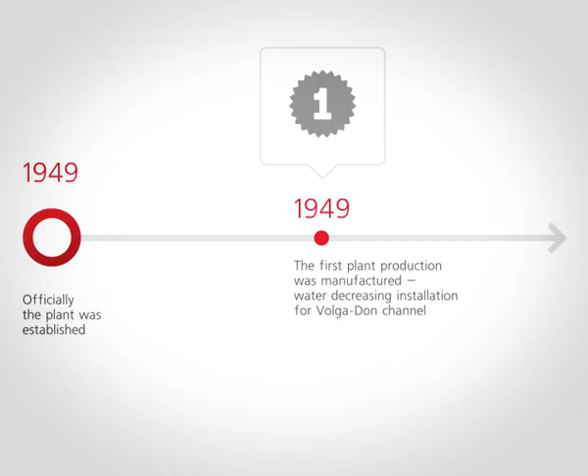Officially, the plant was established in 1949. The very first product manufactured on the plant was a water-decreasing installation for the Volga-Don channel. A centrifugal pumps range was developed for post-Second World War USSR national economy restoration. The first barrel case feed pump, PE 320-180, was supplied to Pridneprovskay TPP.

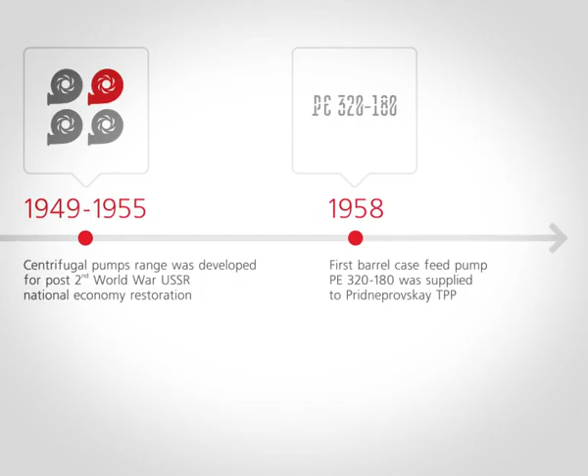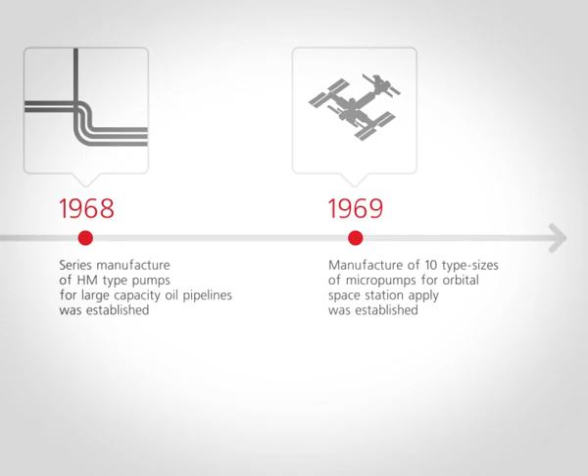Series manufacture of HM-type pumps for large-capacity oil pipelines was established. Manufacture of 10 type sizes of micropumps for orbital space station application was established. More than 1,000 pumps for nuclear power plants of the Soviet Union and other countries were manufactured.

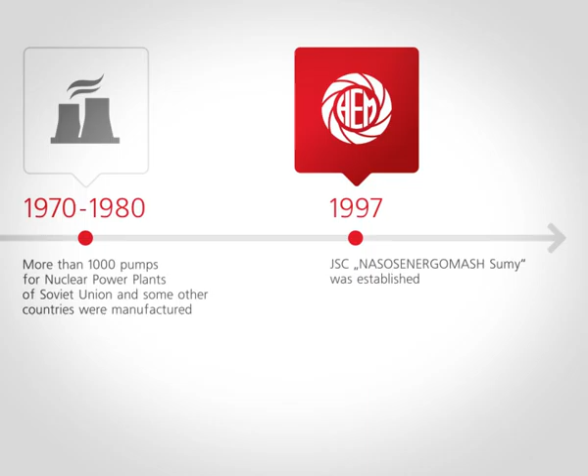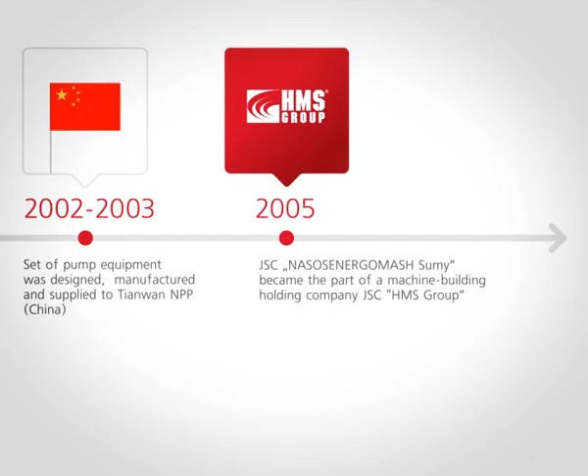Joint stock company Sumy Engineering Works Nasos Energomash was established. A set of pump equipment was designed, manufactured and supplied to Tianwan Nuclear Power Plant, China. Joint stock company Sumy Engineering Works Nasos Energomash became part of a machine building holding company, JSC HMS Group.

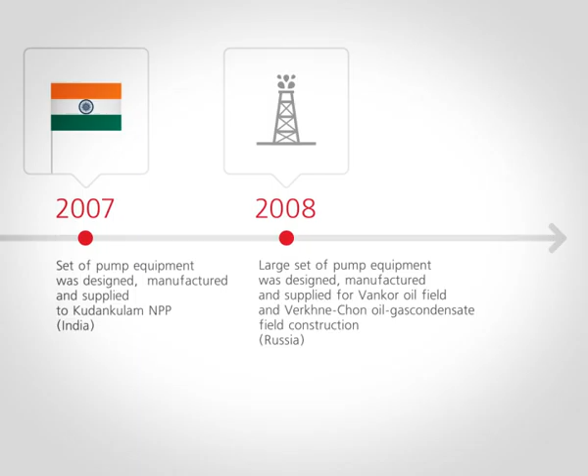A set of pump equipment was designed, manufactured and supplied to Kudankulam NPP, India. A large set of pump equipment was designed, manufactured and supplied for Vankor oil field and Verkhne-Chon oil gas condensate field construction, Russia. Among the largest projects: Yilyngynagys machine channel, main water pipeline channel Zakhmet Turkmenkala, main and booster oil pipeline pumps for oil pipelines Purpe Samotlor, East Siberia Pacific Ocean, and Zapolyarie-Purpe, Russia, were designed, manufactured and supplied.

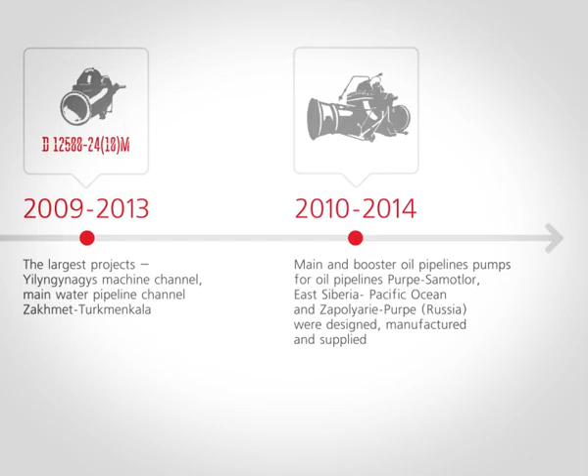A set of auxiliary and emergency cooling pumps, 36 pieces, were designed and manufactured for the 3rd and 4th units of Tianwan NPP, according to contract with CNEIC, China Nuclear Energy Industry Corporation.

From 2005, joint stock company Sumy Engineering Works Nasos Energomash became part of the large multi-profile industrial investment group Hydraulic Machines and Systems, HMS Group companies.

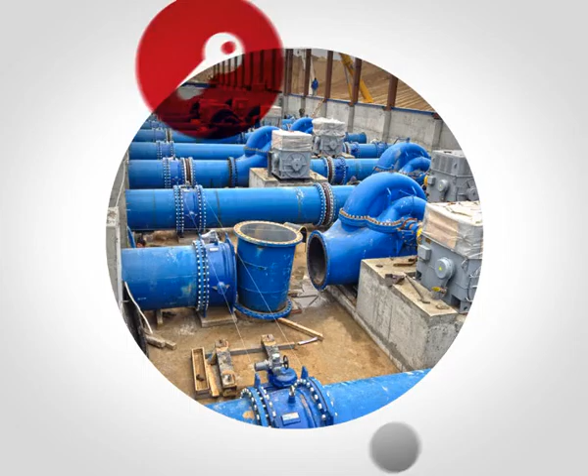Key activity of the HMS Group is EPC engineering and complex equipment supplies for the following industries: oil and gas mining, water supply and offtake, nuclear and thermal power generation.

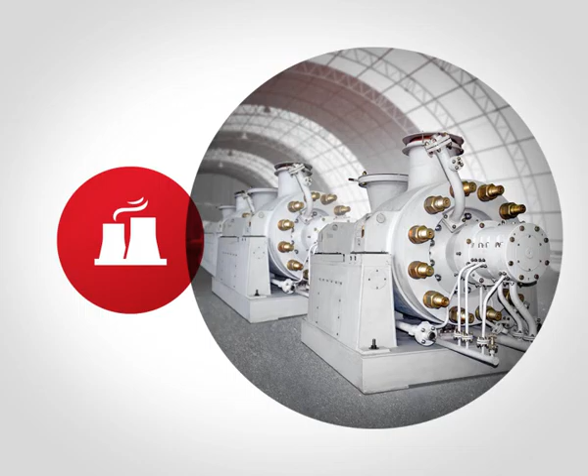Joint stock company HMS Group today is a well-recognized leader in design, production and supplies of pump, compressor and block module equipment. Staff more than 16,500 employees. Number of dealers more than 150. Equipment supplies for former Soviet Union countries, Eastern and Western Europe, Iraq, Indonesia, India and China.

Joint stock company Sumy Engineering Works Nasos Energomash is one of the biggest enterprises of HMS Group. Production area more than 81,250 square meters. Product range includes more than 600 articles.

540,000 is the overall number of pumps manufactured throughout the plant's history. Over 1,300 pumps were built and supplied for nuclear power plants. Today, the plant's product supply geography covers more than 50 countries on 5 continents.

An ambition for constant improvement of products and solutions allowed joint stock company Sumy Engineering Works Nasos Energomash to get leading positions in pump production for the following industries: oil mining and transport, thermal and power generation, housing and communal services, water supply and offtake.

Clients of joint stock company HMS Group and joint stock company Sumy Engineering Works Nasos Energomash are the leading industry companies. Long-term partner relationships with clients have always been our core business value.

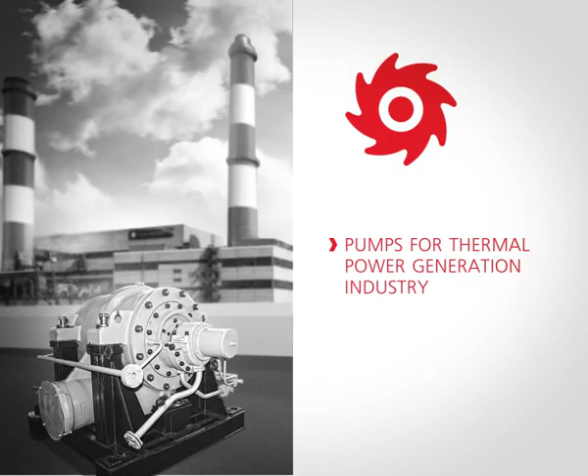Since the first boiler feed pumps built in 1959 to modern times, the company has manufactured and supplied more than 111,800 pump units for thermal power plants all over the world.

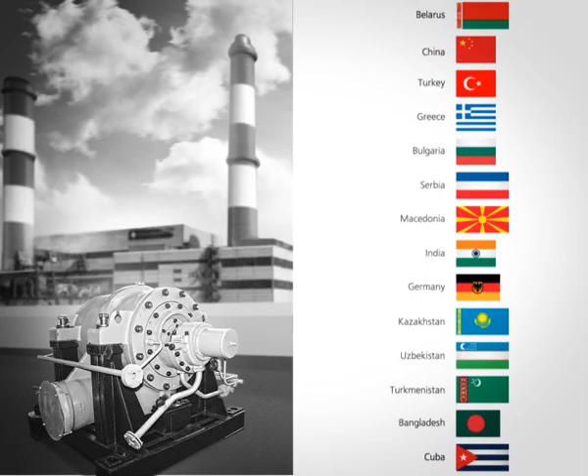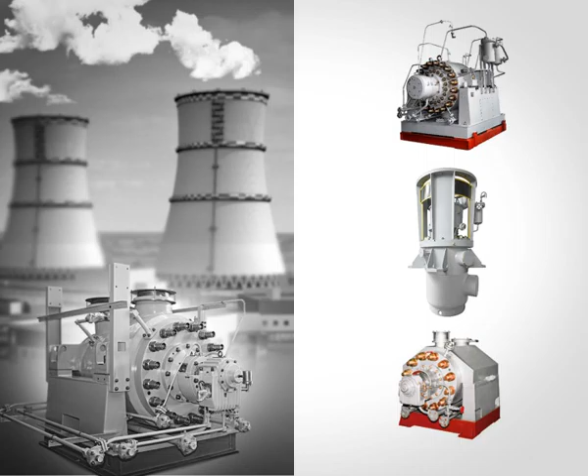Pumps for nuclear power generation industry. Sumy pumps are installed in all nuclear power stations of Russia and Ukraine. They were supplied for NPP construction in Bulgaria, Hungary, Slovakia, India and China.

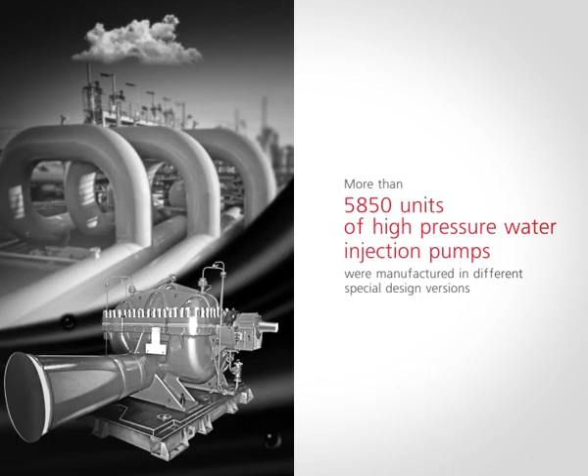Pumps for oil and petrochemicals pipeline transport. More than 5,850 units of high-pressure water injection pumps were manufactured with different customized design variations tailored for each particular customer.

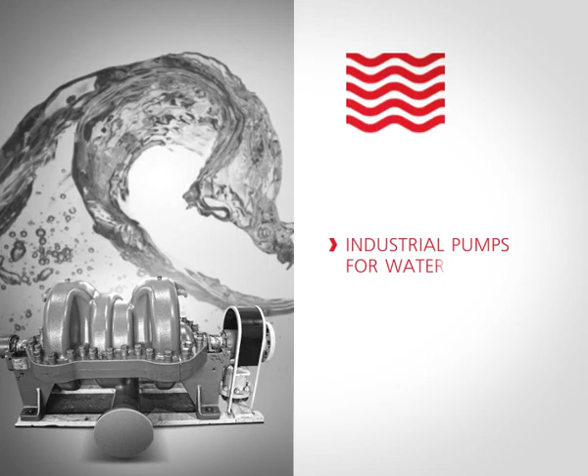Industrial pumps for water supply and offtake. More than 150,000 industrial pump units were manufactured and supplied for the pump stations of Europe and Asia.

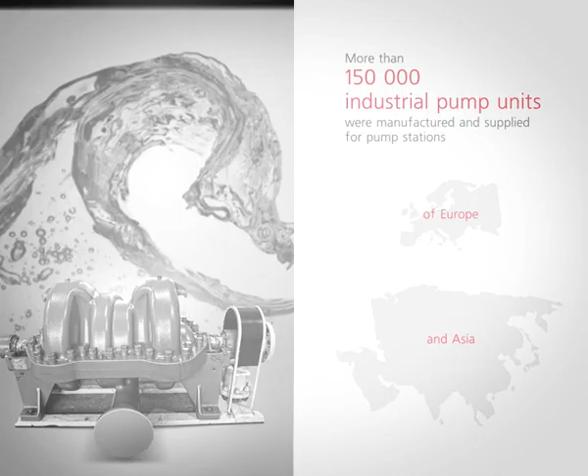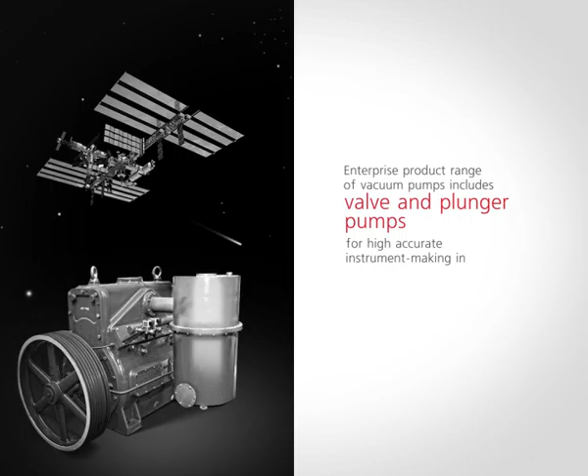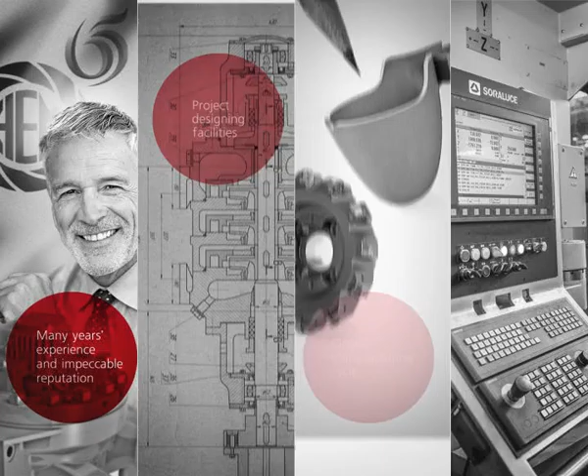Vacuum pumps for various industries. The product range of vacuum pumps includes valve and plunger pumps for highly accurate tools and instruments, microbiological installations, and electrical engineering. The enterprise's claim to success is based on years of experience and impeccable reputation.

Project design facilities. Closed manufacturing cycle. Innovation in production technologies, as well as business process automation, quality control, high accuracy testing, and complete after-sales service.

Project design facilities. The enterprise structure includes a powerful research and design department.

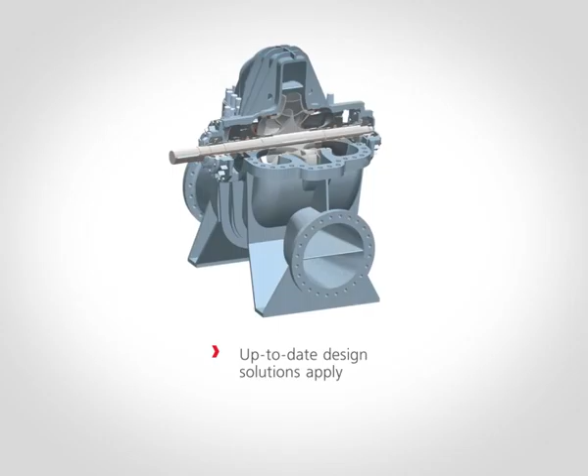Besides our own design department, the enterprise has tight cooperation with the leading Ukrainian Research and Design Institute of Nuclear and Power Pump Building, VNIIAEN. This cooperation guarantees state-of-the-art design solutions, advanced high-precision calculation methods, research and experimental testing for all design elements of the pump unit, and new technology and equipment.

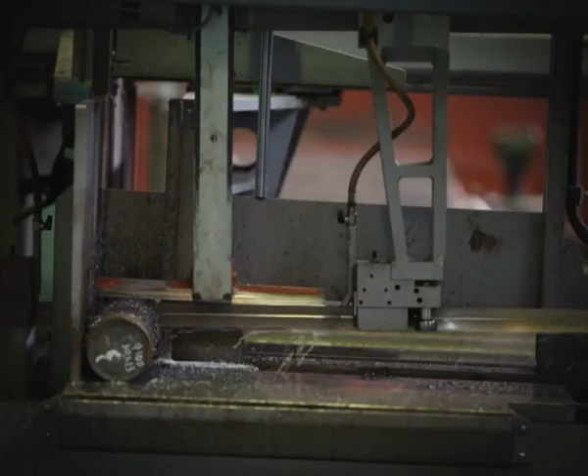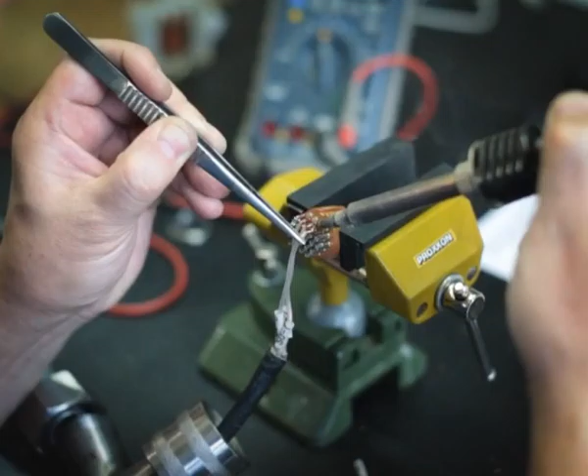Joint stock company Sumy Engineering Works Nasosenergomash constantly innovates in product design and manufacture. Such policy is very important because we ship sophisticated and reliable pumps to the world's biggest companies.

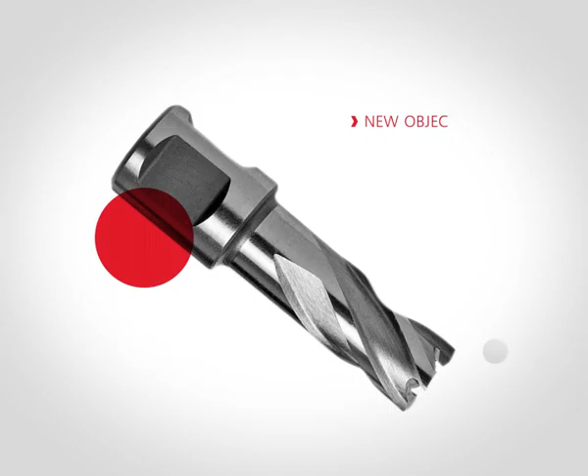All our manufacturing departments were recently modernized and their processes optimized. To ensure high quality of our products, we renew and improve our machining park on a regular basis, as well as implement new units and equipment.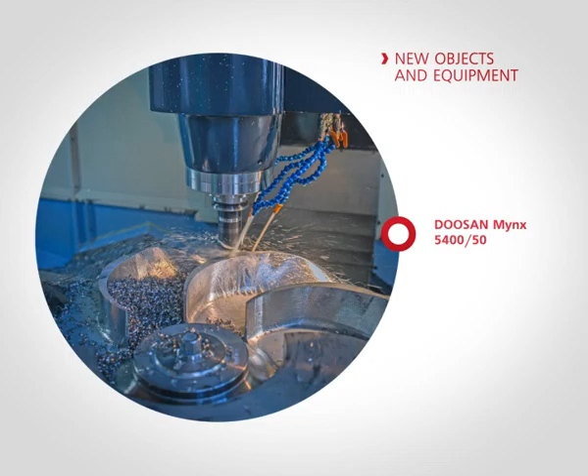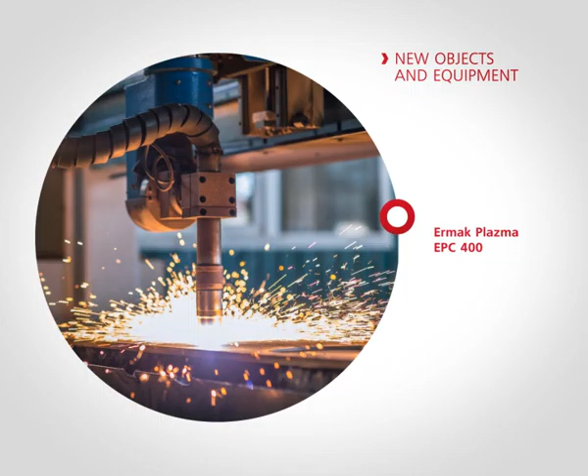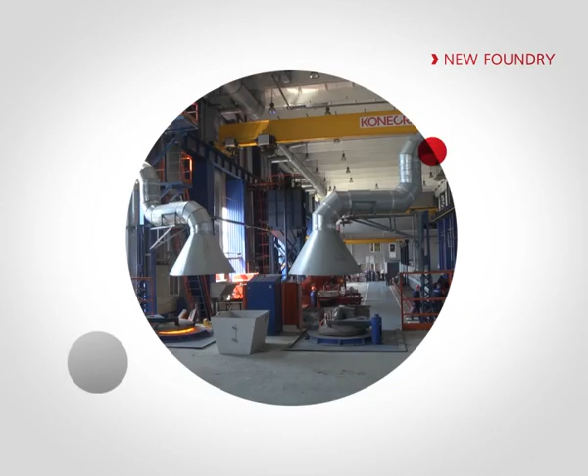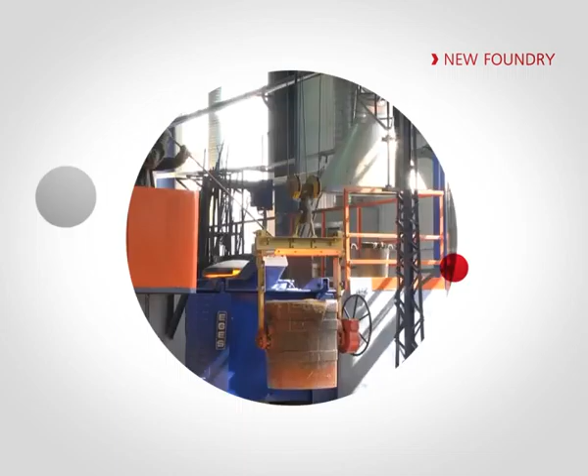To maximize foundry automation and increase casting product quality, we launched a new foundry where human factor is down to a minimum. The new foundry's annual production capacity is 4,000 tons of casting. New foundry product materials are the following: cast iron, different cast steel grades, duplex and super duplex steel. New foundry products comply with world's leading standards by general outlook, meticulous design, and physical and chemical characteristics.

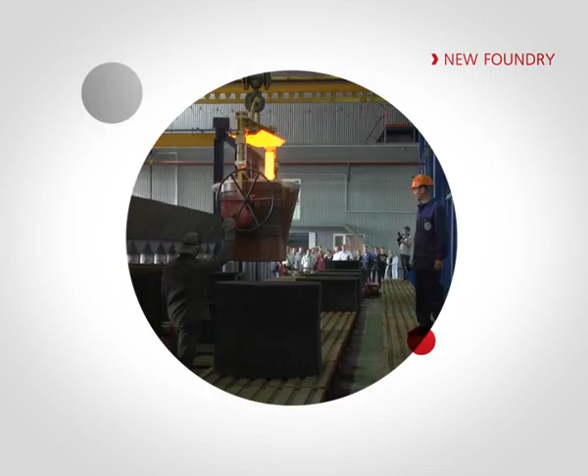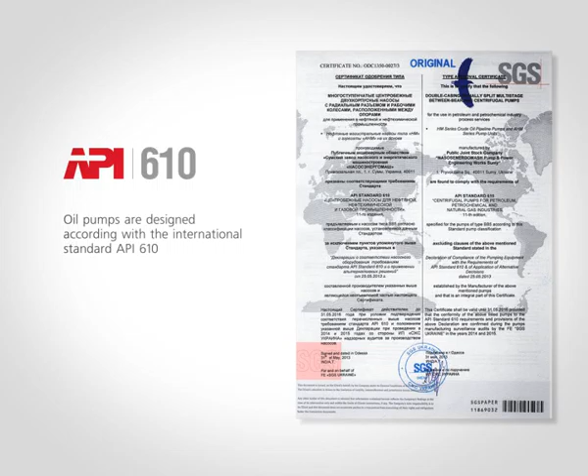Quality control: pump units are manufactured in full compliance with leading international industry standards. Oil pumps are designed according to the international standard API 610. Our oil pumps are included in the purchase list of joint stock company Transneft. Pumps for the nuclear generation industry are included in the catalogue of equipment and materials for NPP designing, building and operation of the Russian Federation.

We have implemented an integrated management system certified according to the international standards OHSAS 18001-2007 and ISO 14001-2004.

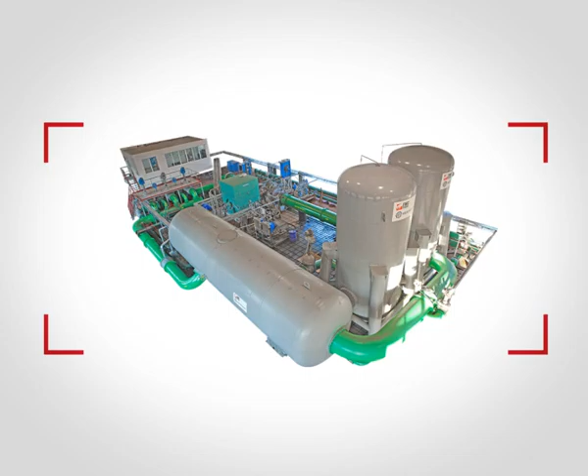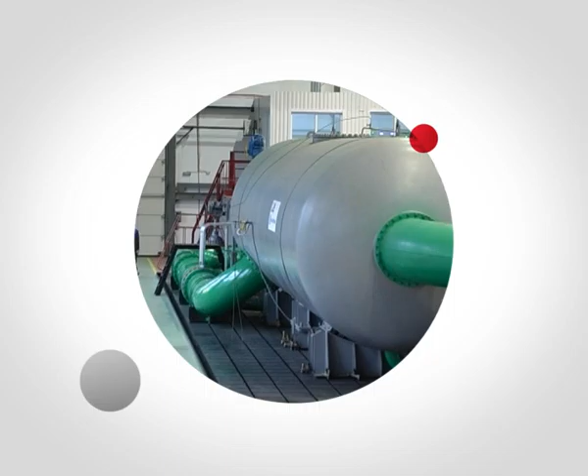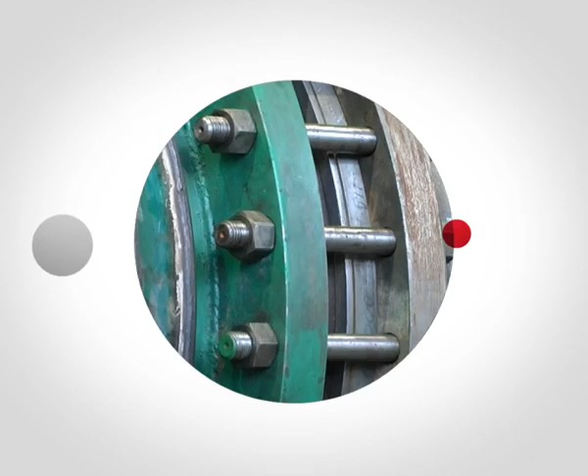High accuracy testing. What makes our enterprise truly unique is the testing complex for high-pressure electropumping units, as well as large flow units, which have no analogies anywhere in CIS and Eastern Europe. Our testing complex makes it possible to test our pump units at nature capacity and rotation speed. It can also be used to simulate different failure and emergency situations which could occur during actual operation. Only several of the world's leading companies have similar testing facilities, and now joint stock company Sumy Engineering Works Nasos is one of the leaders in this field.

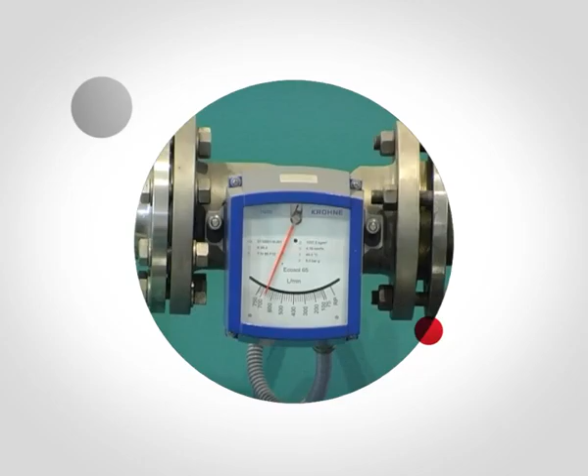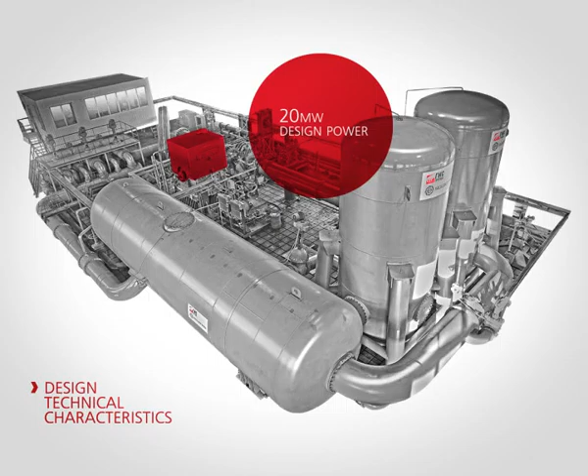Design technical characteristics: design flow 25,000 cubic meters per hour, design pressure 280 kg force per square centimeter, design power 20 megawatts. Taking part in large-scale international projects, over the last 5 years, the enterprise has made significant progress in entering new markets.

Nuclear power generation industry: we take pride in one particular type of product, a state-of-the-art boiler feed pump for NPP, PEA 1840-80. These pumps are intended for boiler feed water supply from deaerator to steam generator of the NPP unit.

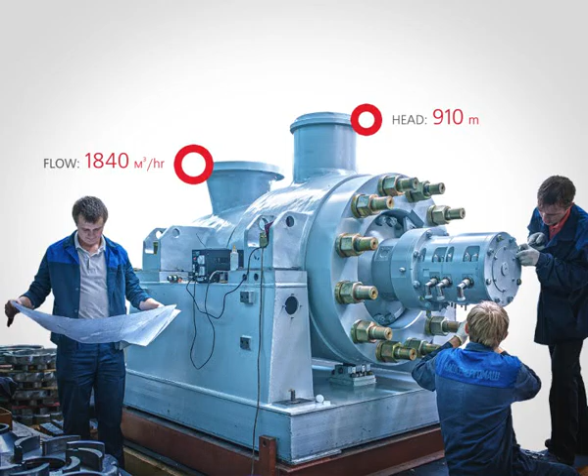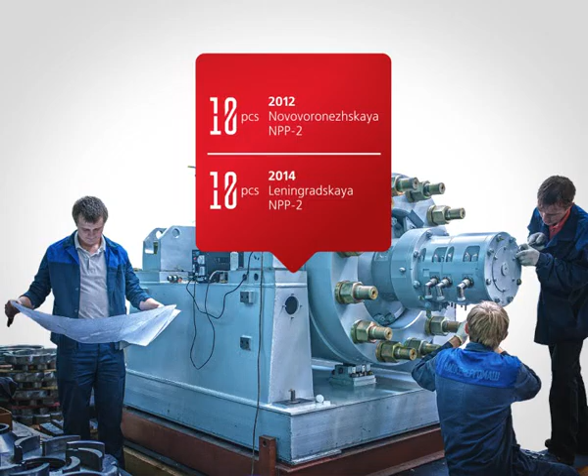Pump parameters: flow 1840 cubic meters per hour, head 910 meters. Having designed the pumps from scratch, we have supplied 20 units to NPPs of the Russian Federation over the last 4 years: 10 pieces in 2012 to Novovoronezhskaya NPP 2, and 10 pieces in 2014 to Leningradskaya NPP 2.

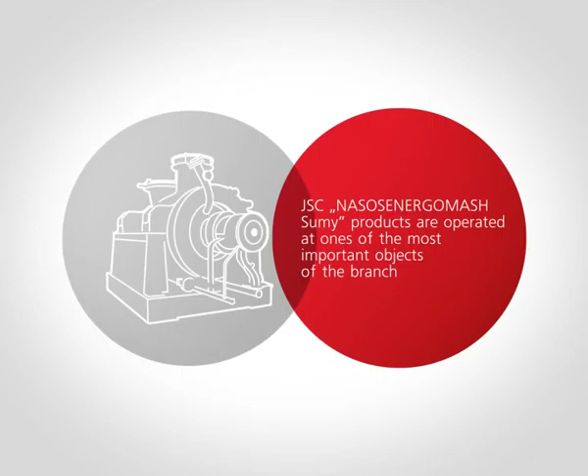The products of joint stock company Sumy Engineering Works Nasos are used extensively by the most important facilities within the industry: Rostovskaya NPP, Leningradskaya NPP, Novovoronezhskaya NPP 2, Kalininskaya NPP, Baltiyskaya NPP, Kudankulam NPP in India, and Tianwan NPP in China.

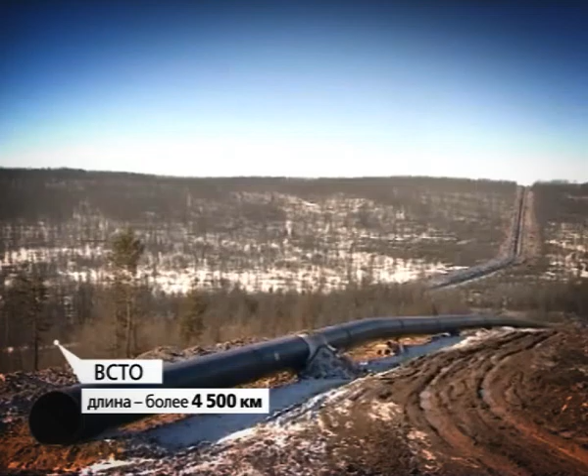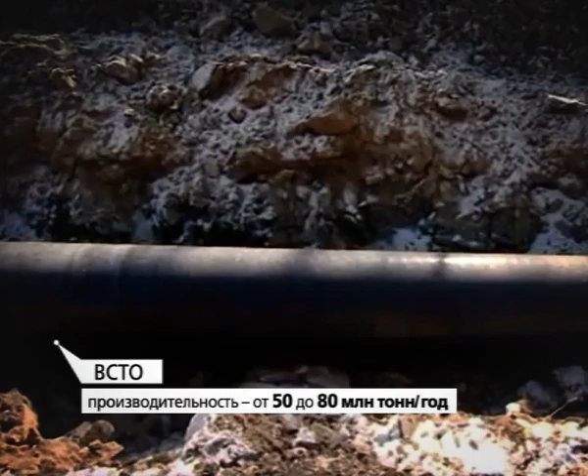In the oil industry, the main oil pipeline East Siberia Pacific Ocean, ESPO-1, ESPO-2. The oil pipeline East Siberia Pacific Ocean, ESPO, has a pipeline length of more than 4,500 kilometers, pipeline capacity of 50 to 80 million tons of oil per year, and pipeline pressure of 75 to 100 kg force per square centimeter.

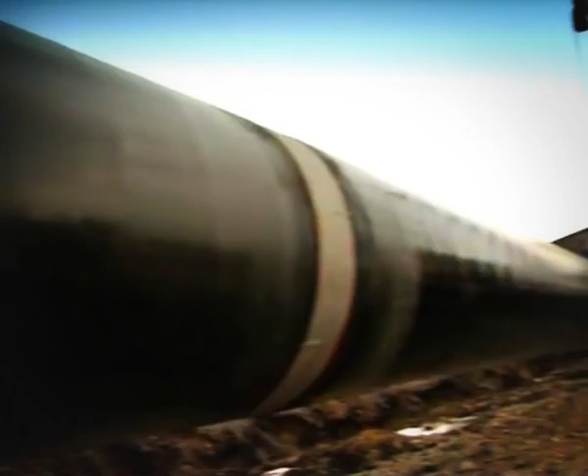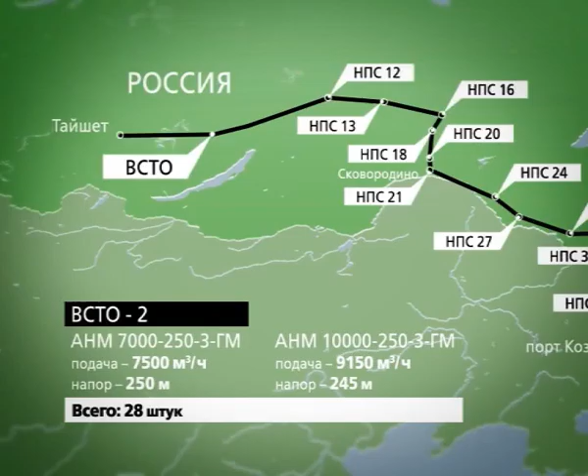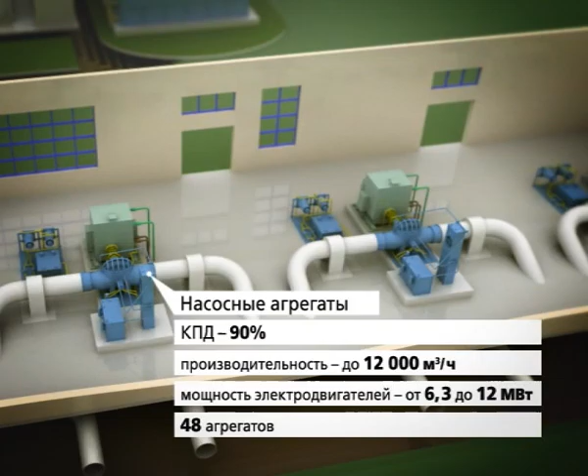To transport such significant volumes of oil, powerful pump stations are needed. ESPO pump stations are equipped with pump units which were specially designed and manufactured by joint stock company Sumy Engineering Works Nasos. Pump efficiency is around 90%, pump capacity is up to 12,000 cubic meters per hour, motor power is up to 12 megawatts, pump units quantity is 48 pieces, and pump stations quantity is 12 pieces.

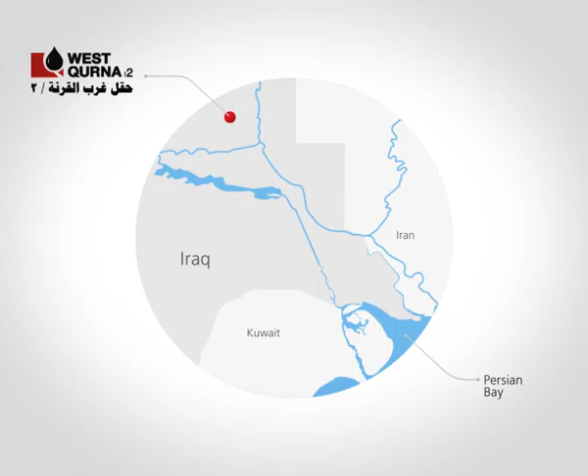West Qurna is one of the largest world oil fields, situated at the Persian Gulf oil and gas deposit, with 13 billion barrels of recoverable reserve. Base formations: Mishrif and Yamama.

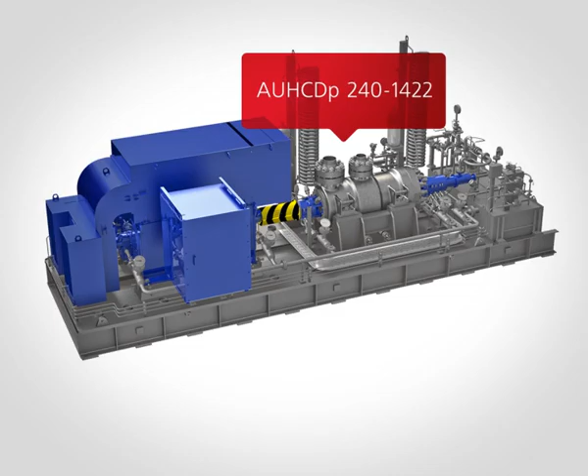High-pressure water injection pumps, AUHCDp 240-1422, were manufactured. Applied materials ensure resistance to highly mineralized, aggressive salty water. Project development was carried out according to modern international standards API 610, API 614, API 682, API 671, ASME, ANSI.

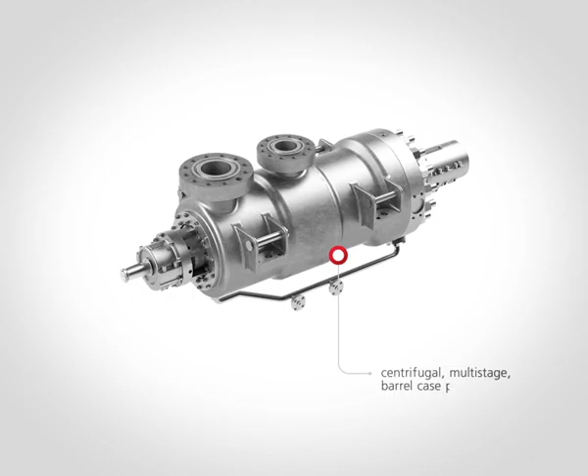Centrifugal multi-stage barrel case pumps with hydraulic balanced rotor. Materials: duplex steel.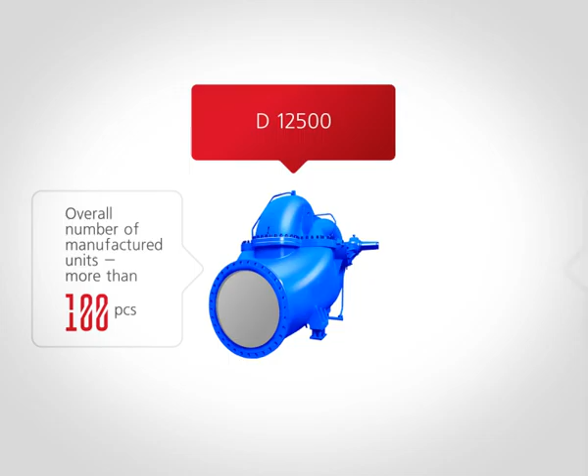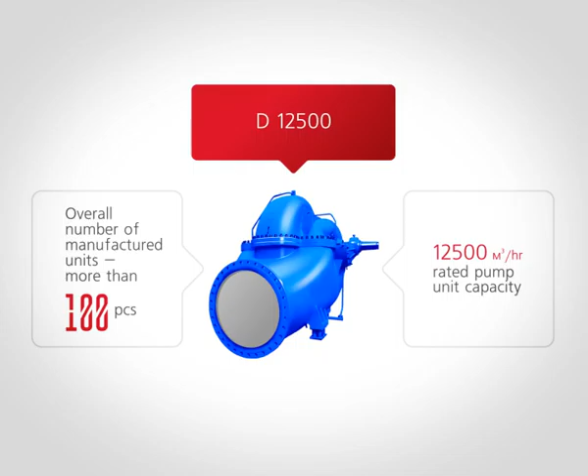Applied pump type: double suction pump of D12500 model. Rated pump unit capacity is 12,500 cubic meters per hour. Overall number of manufactured units is more than 100 pieces. Applied materials ensure resistance and long-term service while pumping water with significant sand content.

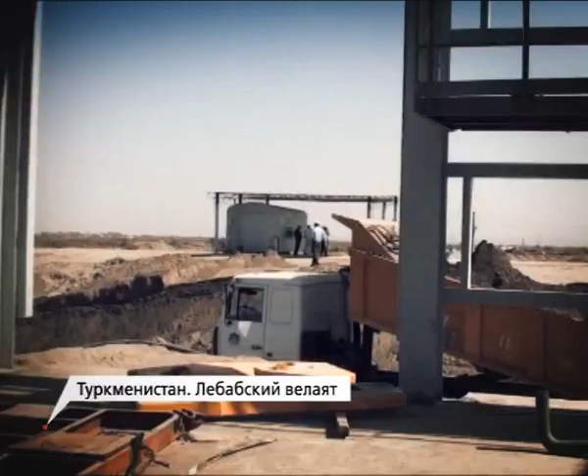Building Yilginagiz Machine Channel Head Pump Station. Overall capacity 35 cubic meters per second. Irrigated area 35,000 hectares.